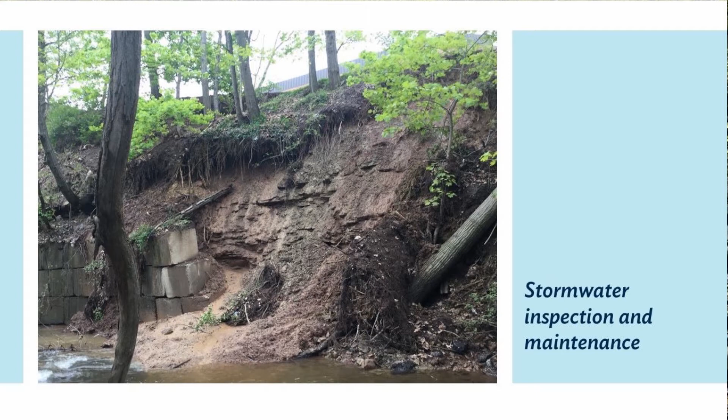One of the first things that we've done at the Northeast Ohio Regional Sewer District, and we've been doing this for years, has been getting out in the field and inspecting the regional stormwater system. Again, that 476 miles of stream network, whether it's a small tributary stream or the mighty Cuyahoga River, we are inspecting that for debris jams, sediment deposition, erosion issues, understanding where flooding is occurring and affecting infrastructure, road crossings, private property, and the like. As you can see, there's much debris that accumulates in these stream courses, big and small, at critical points within the system, either at culvert crossings, railroad crossings, bridge abutments, and other items like that that could cause significant issues during large storm events.

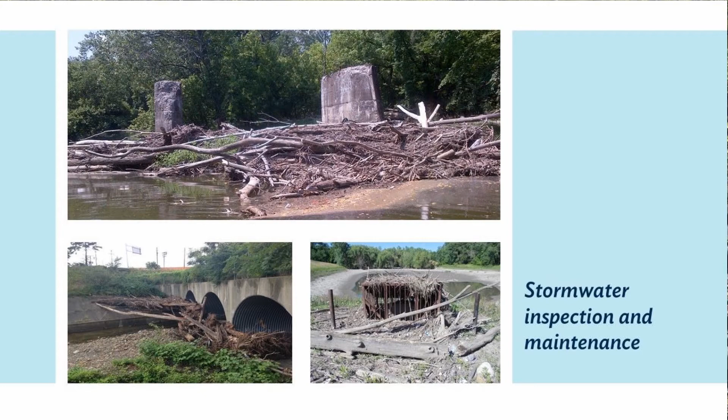So our stormwater inspection and maintenance crews are out in the field inspecting that and then managing to remove that material from the system. So again, we achieve free-flowing conveyance during storm events.

Any customer in our service area can contact the Northeast Ohio Regional Sewer District to make us aware of issues that they see on their local stream. Our customer service number is 216-881-8247, and you can contact that number at any time and get a customer service representative to pass that information on to our stormwater inspection and maintenance group.

We do service 56 member communities through our stormwater management program, and we have a person that's dedicated and assigned to each of those communities, and we refer to those folks as our watershed team leaders. So they are a conduit to the communities and back to the district for information passage back and forth, so we understand what's happening in the field at all times.

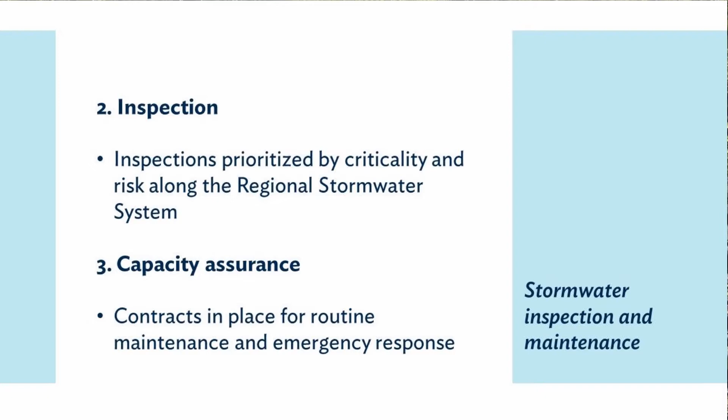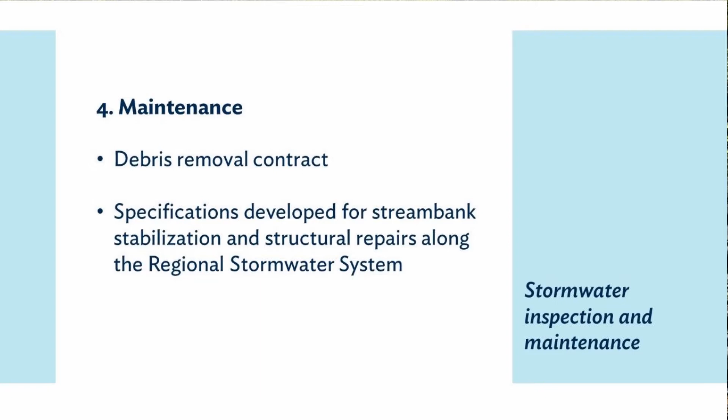As I mentioned before, we do thorough inspections of that regional system throughout the year to ensure capacity, and if need be, we have contracts in place to address any emergency issues that need to be addressed and or routine maintenance throughout any given year. We're addressing debris removal. That's typically large woody debris that accumulates along the stream or river corridors that builds up in the stream itself. We remove that material again to make sure that we have free-flowing conveyance.

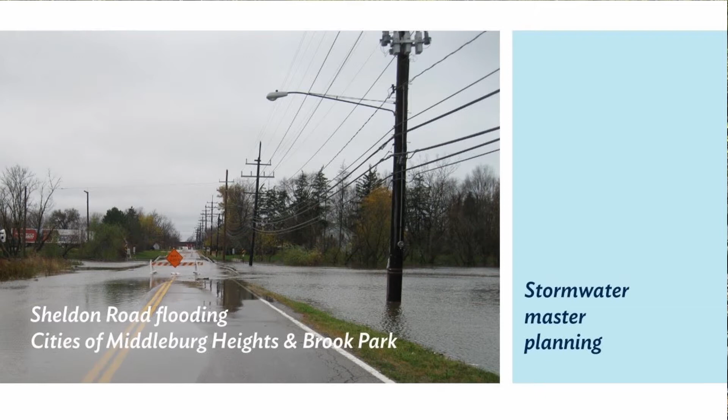The next main pillar of our program is our stormwater master planning program, where we are looking at each individual major watershed for the first time really ever in Northeast Ohio to comprehensively understand where erosion is occurring, how the flooding is occurring, and what it is affecting, and then what water quality issues that we can try to address as we deal with the erosion and flooding.

To give you some understanding of what those are, we have the Cuyahoga River South master plan that is nearing completion, or it is completed now. That was a significant investment for that particular area, where we have developed alternatives and now recommendations that we will move into our design and construction phase to implement solutions along those watersheds within that master planning area.

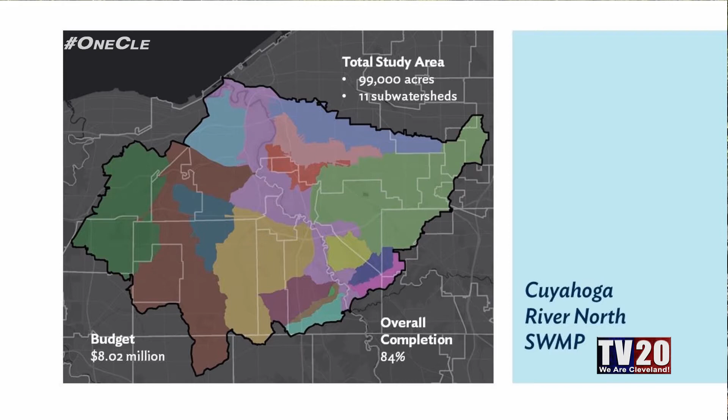We've broken the Cuyahoga River up into the south and north areas because it is a larger watershed, and we're moving to completion on the Cuyahoga River North master plan—another significant investment in the region to understand all the erosion, flooding, and water quality issues in this watershed.

The Rocky River is receiving the same treatment, so an individual stormwater master plan is underway in the Rocky River watershed, addressing streams like Baldwin Creek, Abram Creek, and Baker Creek in the western part of our service area. We've also combined the Chagrin River and Lake Erie direct tributaries watersheds into one master plan, launched this year in 2019, looking at those same issues discussed on previous watersheds.

From the master plans, we develop alternatives and recommendations, and those move forward into a nomination and prioritization process, from which we take our stormwater revenue fees and develop a prioritized budget for design and construction to implement projects throughout the region addressing erosion, flooding, and water quality issues.

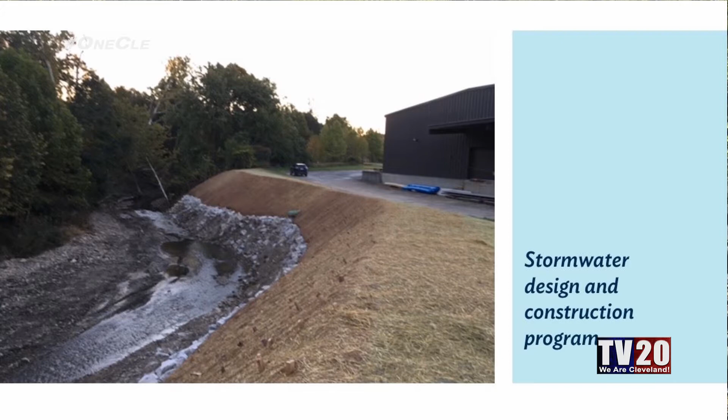To provide clearer examples of what we're addressing: this is a location where the stream bank along West Creek has failed, close to an assisted living facility and a medical facility. The regional stormwater management program looks at this issue through the master plan, understands the best alternatives, and develops a refined recommendation to create a prioritized project we can budget and implement to solve this issue.

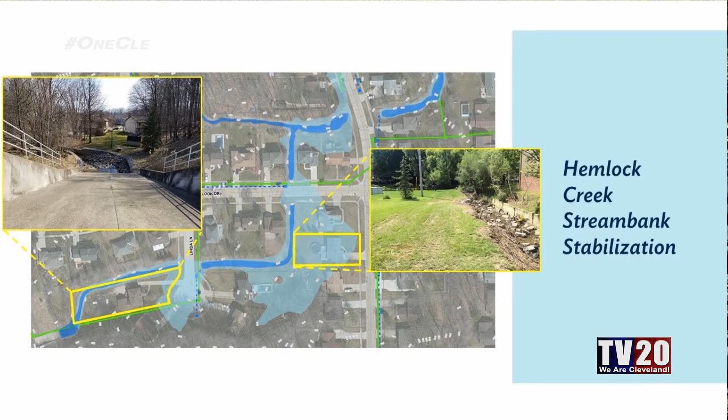Another example is in the Hemlock Creek watershed, where residential development has occurred in the past. The stream has been maneuvered and pushed in different directions over time, creating flooding and erosion issues that need to be addressed. We apply our master planning analysis, develop a recommendation, and move toward design and implementation of a construction project to address the stream affecting private properties along Hemlock Creek.

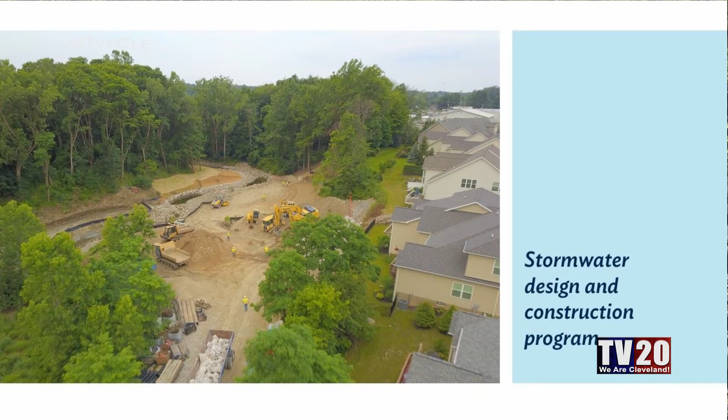Moving into construction—what have we done thus far under the program? The program has been moving forward since 2013 when we initiated fee collection, and I'll talk more about the stormwater fee in a few moments. In terms of construction completed thus far, here are a few examples.

This first example is Beecher's Brook in Mayfield Village. You can see the significant erosion occurring along Beecher's Brook—it's been happening for years. Beecher's Brook has steadily been marching toward a residential development. In the picture shown, you can see the rooftops of the homes up on the bluff overlooking Beecher's Brook.

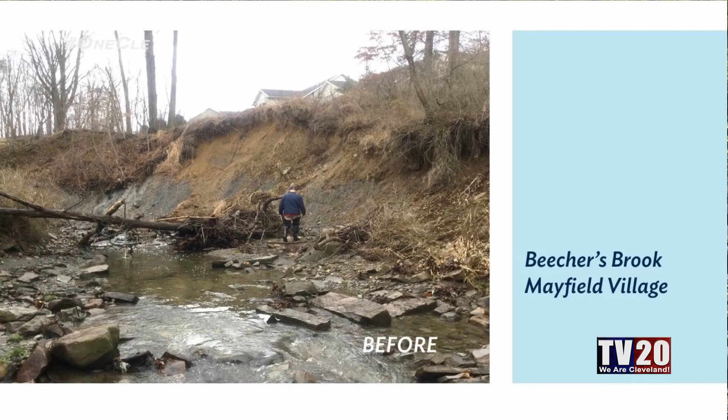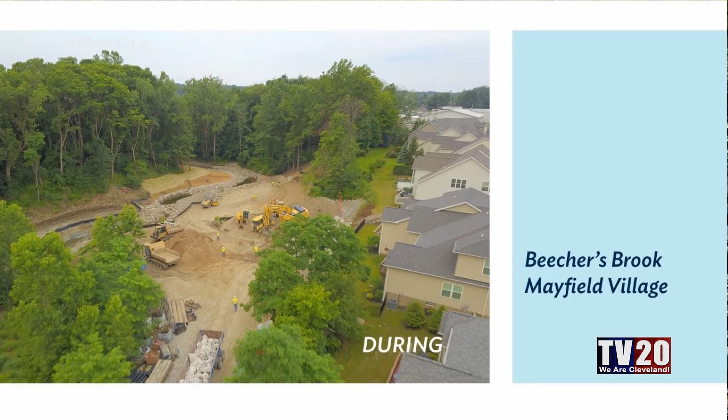In this photo you can see the construction underway—an aerial view showing the proximity of the actual homes adjacent to Beecher's Brook. At this point we've already moved Beecher's Brook further away from the homes, using natural channel design with more sinuosity and flow path to dampen flows during storm events, lessening the velocities to soften the erosion that was occurring.

So we provide a holistic watershed-based approach to our projects to ensure that we capture not only erosion control and flood control, but also water quality.

Moving into Doan Brook within the city of Cleveland, in the Rockefeller Park area—Doan Brook, again, was marching steadily toward the Cleveland Museum of Art, causing a slope failure.

So this was an area that needed to be addressed as well from an erosion standpoint. This is a view of that project under construction.

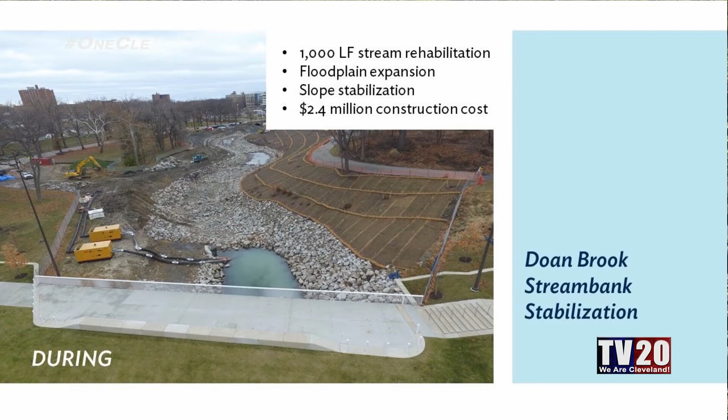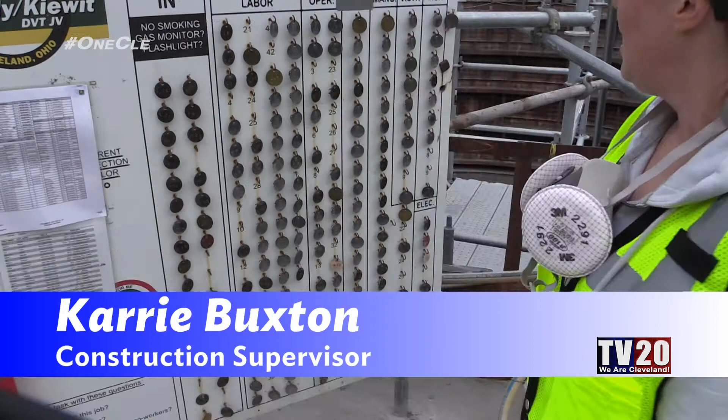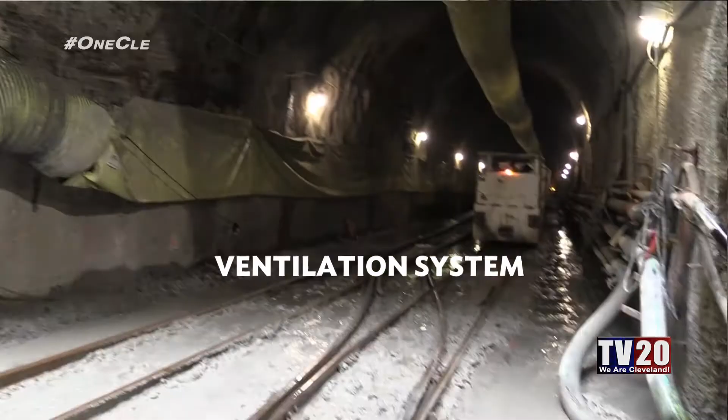So all these brasses where it says brass in, these are all personnel right now that are down in the tunnel, which gives you an idea of how many people actually go in and out of the tunnel on a daily basis. This is our ventilation system - that's the actual ventilation that goes down to the TBM, that flexible line, that flexible bag line that you can see there. Those are the actual segments that we use to create that lining system.

All the grout that's produced that goes behind those ring segments as they're installed gets produced up here. It then goes down via pipeline the whole entire length of the tunnel to the actual face where it's being injected. Right now what they're doing is they are unloading muck boxes.

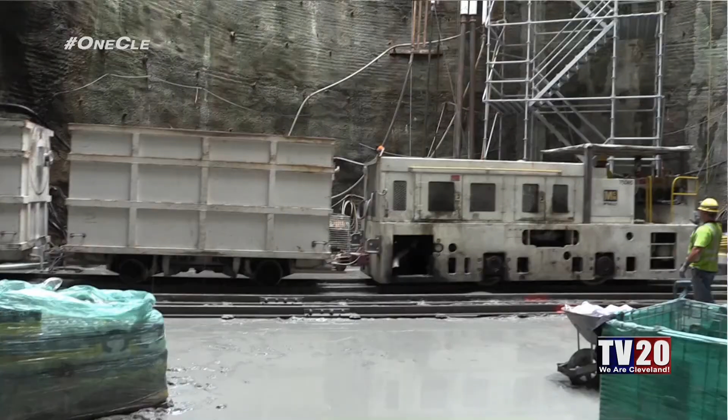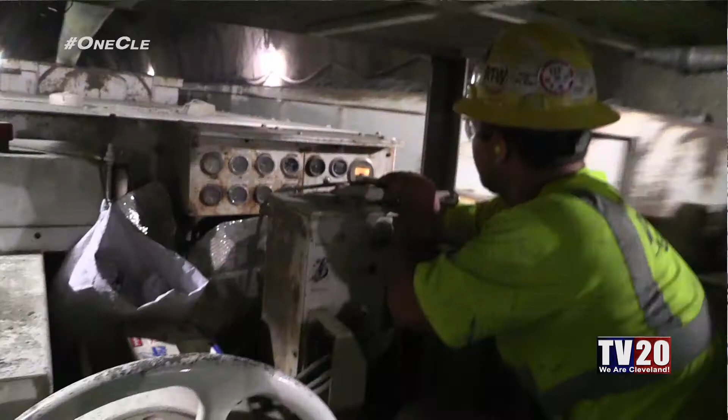For every 5 feet of mining that we get, it fills up about 8 muck cars. Once the train cars are empty, this train will move its way back up to the TBM and get refilled and then come back. It's a constant shuttle all day long - they have 2 trains running the whole entire time. As we get farther and farther away from this location, it takes longer and longer each trip - about 20 to 25 minutes to run out to the actual cutter head.

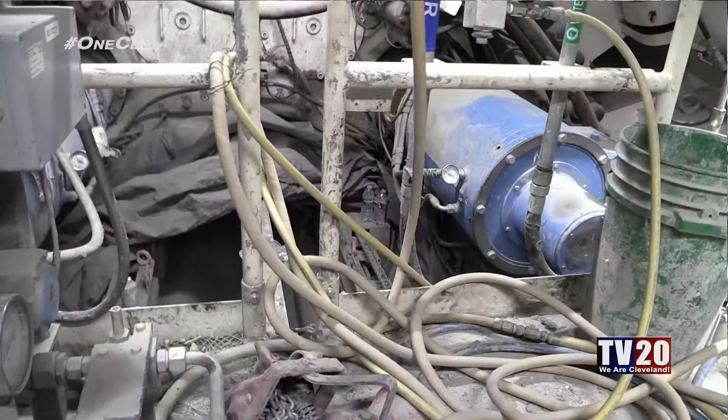This is the actual spoil straight from the cutter head. As that cutter head is spinning and thrusting forward, that is the material that it's actually grinding out. So we're running mining operations out of here 24/7 right now - there's 3 shifts.

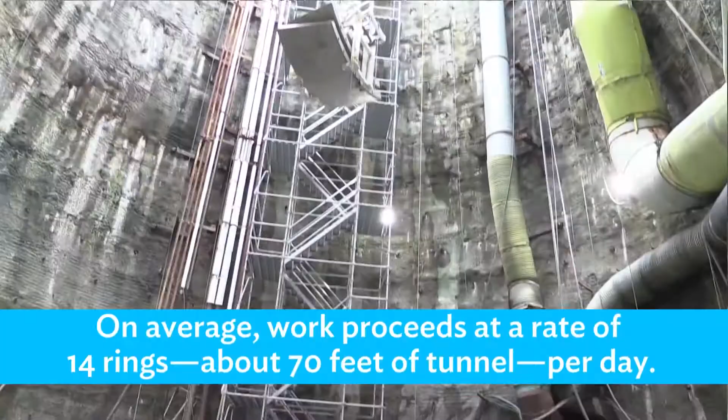Solid concrete all the way through the segments. It's actually a steel fiber reinforced concrete.

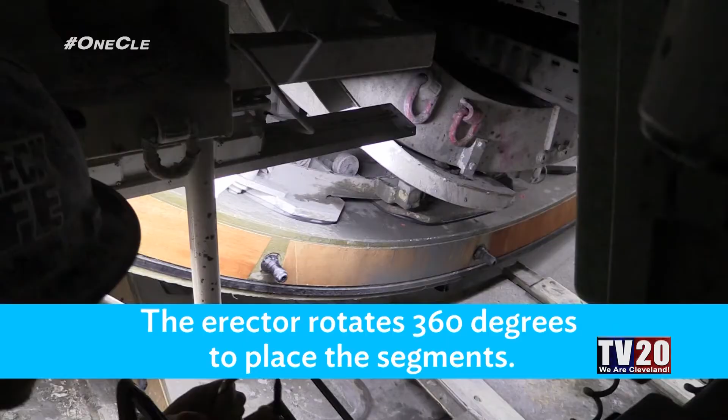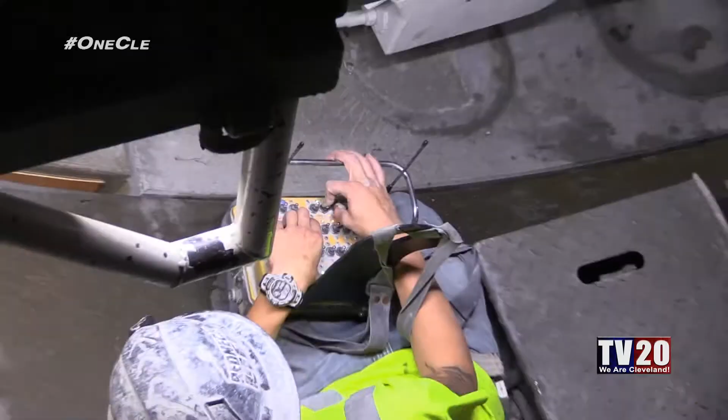I've been in this business now for about 20 years. After a while, you don't even realize you're down here. You forget you're even underground sometimes, for me anyways.

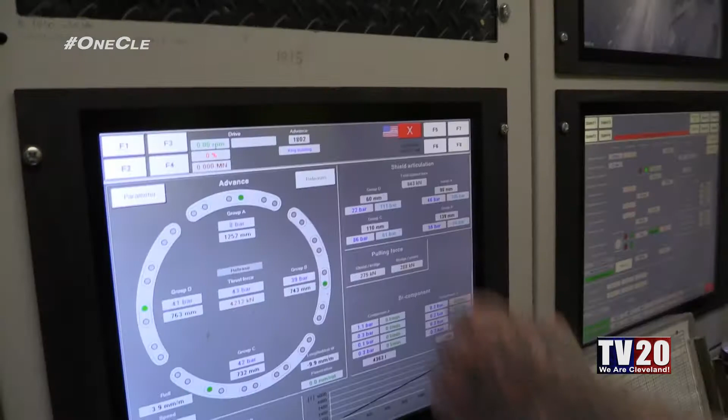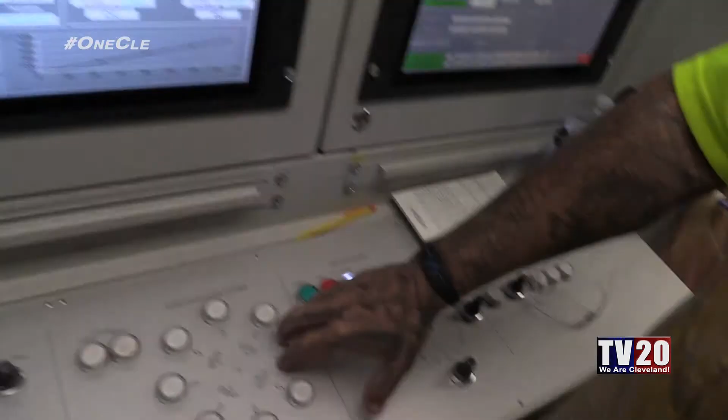Here we have our guidance system - it gives us an idea of where the machine's at and where we need to be. We can control the angle of the head with these controls here. For example, if we need to go to the right, we can steer right here and then also push harder on the left side of the machine. It's been a fantastic machine so far.

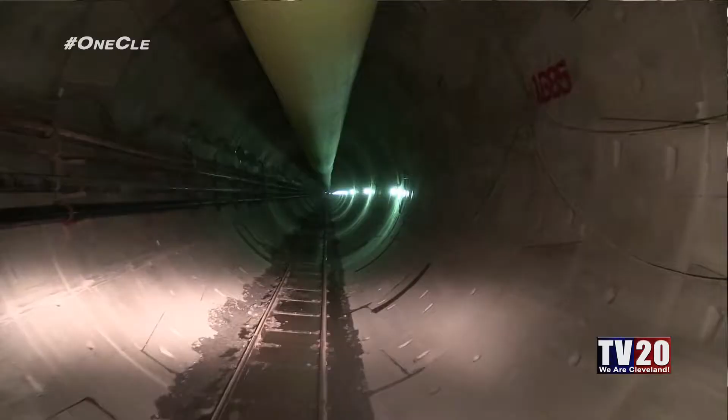Now this is the keystone that he's putting in right at the top. Once this tunnel is finished, it'll almost be 2 miles in length.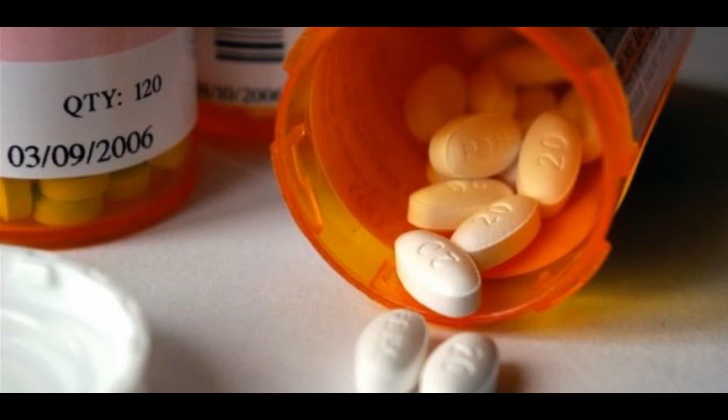Did you know flushing your expired or unused medications can be harmful to the environment? Wastewater treatment plants are not equipped to remove pharmaceuticals from wastewater, and when the treated water is released into the Cuyahoga River and Lake Erie, it can still contain traces of these medicines. The best way to dispose of unwanted medicine is to check for a local collection event. The Cuyahoga County Sheriff's Drug Drop Box program allows residents to deposit unwanted prescription drugs at drop boxes across the county.

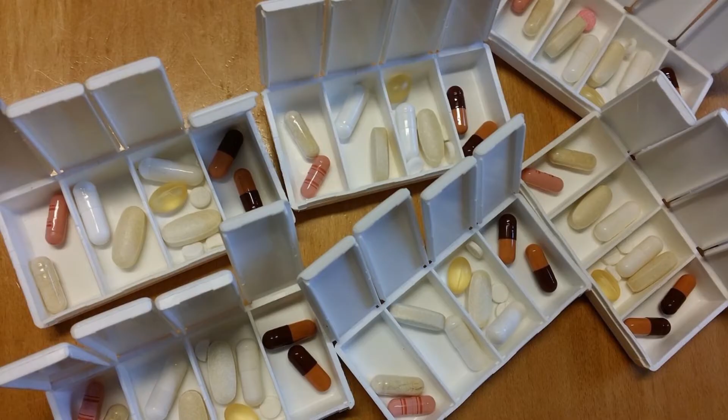To find a drop-off location, visit rxdrugdropbox.org or call 211. The Northeast Ohio Regional Sewer District also makes it easy to pitch those pills and safely dispose of unwanted medications at our free pharmaceutical collection events. If you are unable to attend a pharmaceutical collection, there are ways to safely dispose of medications at home. Visit neorsd.org/pitchthosepills for more information. Protect water quality and your family by disposing of pharmaceuticals properly and safely.

Now Jen is going to talk to one of our microbiologists about water quality and testing. Today I'm here in the Analytical Services Department of the Northeast Ohio Regional Sewer District. Our lab conducts tens of thousands of tests every single year, testing waters from area beaches, from waterways, and our 3 treatment plants as well.

Today I'm here with Adam Diedrich. He's a microbiologist here at the district. Can you tell me a little bit about the study that we're participating in? Yeah, so right now we're testing the waters of the beaches and rivers in Northeast Ohio for bacteria that is specific to humans. This bacteria lives in the human guts, and when we flush our toilets and the water goes into our sewer systems, it can potentially get into our lakes. So right now the human DNA that we're testing for is called HF183. It's a method that was developed by the EPA, and we brought it into our lab to use.

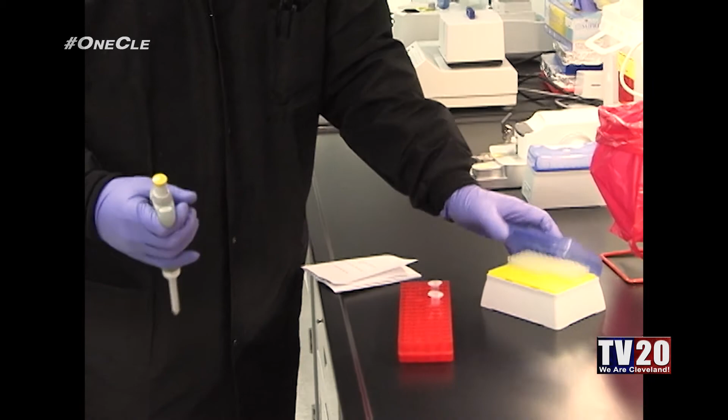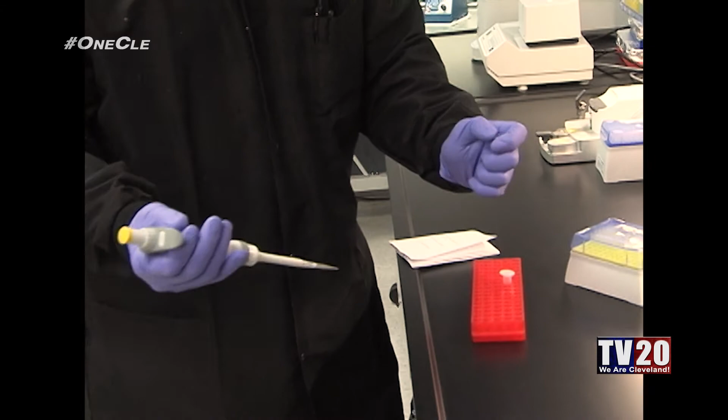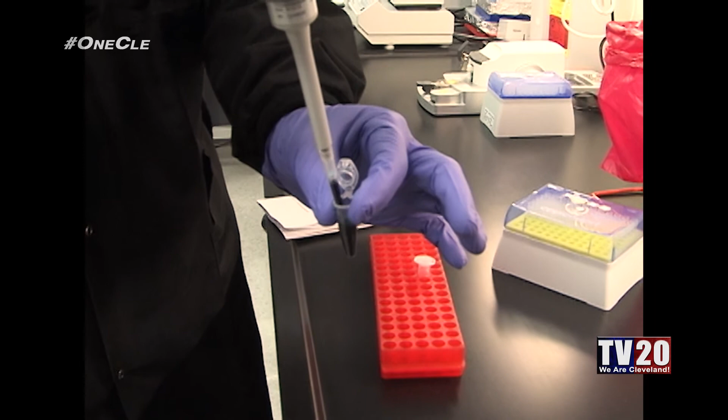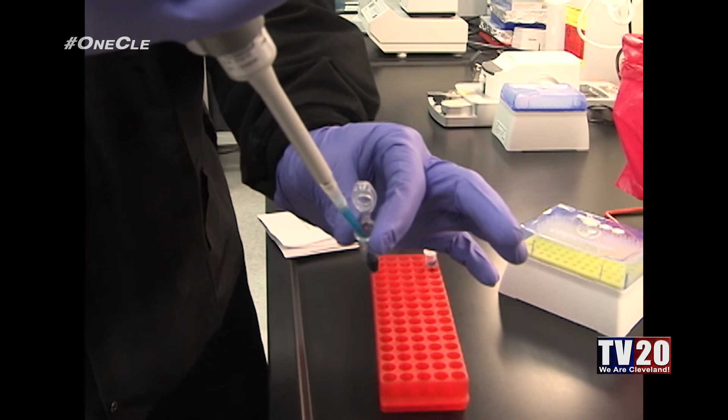Can you show me a little bit about the work that you're doing here? Yeah, so one of the things I work with commonly, pretty much every day, is called a micropipetter. What you do is I have this box full of tips. Get one tip. There it is. And I take this nice little blue solution that I've made, open the cap up, insert. The fluid gets drawn up. I transfer it into the other tube. And then ideally, when you're actually running the studies, those would be samples that would be collected by our Water Quality and Industrial Surveillance Group, right?

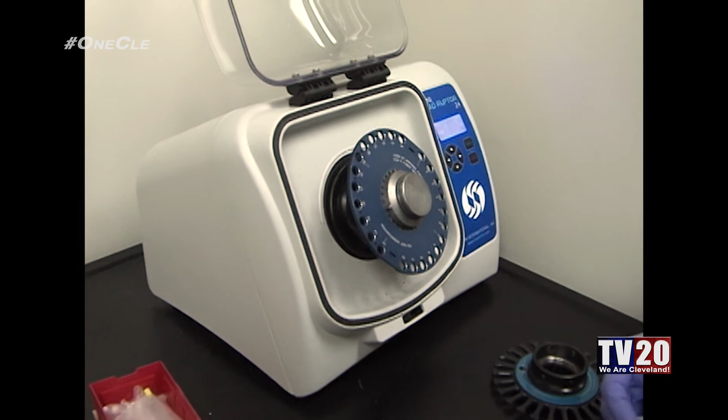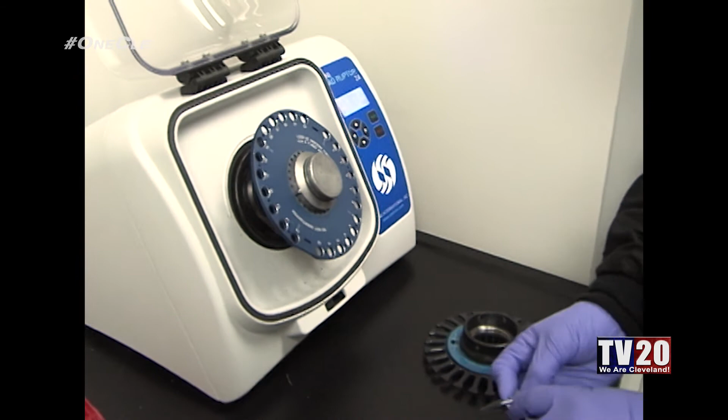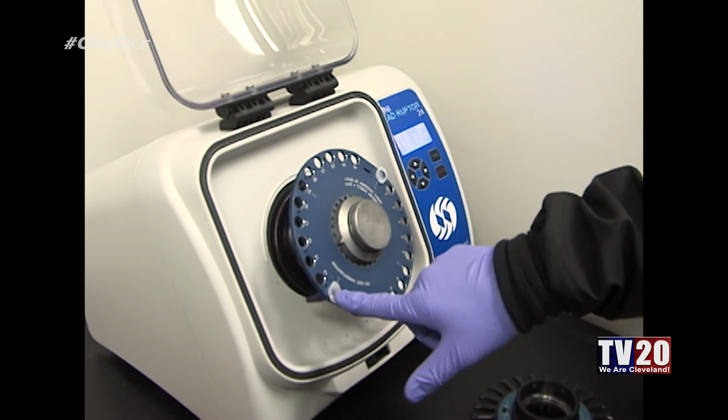Yeah, they go to rivers, the lakes. Certain CSOs are tested on a regular basis. We periodically get samples from our wastewater plants. So once our sample is taken from the environment and put into vials such as these, we need to break the cells up so we can get access to the DNA for the testing. For that, we employ a bead beater. It beats up the cells and allows access to the DNA. So for this instrument, you have to load it evenly. So that's why I have one vial here and one vial here. Next, we put this little cap on it. Next, we lock it, put the cover down, and the fun part.

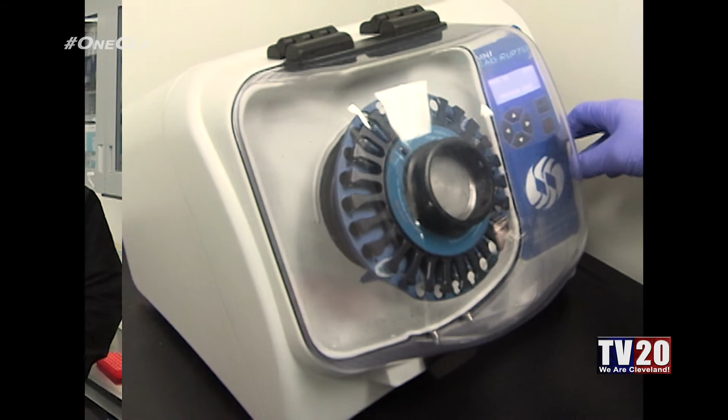So when the study's completed, what do we expect to find, or what do we hope to find? Well, we always hope to find no contamination. Unfortunately, that's not always true. So we monitor locations to find out if there's human DNA in our water streams, and if there is, it gives us an opportunity to figure out where it's coming from and to mitigate that issue.

Great. Well, thank you so much for having us out today, Adam, and showing off a little bit of your lab. We really appreciate all the great work that you do and the great work that your entire team does to help make our Great Lake great. Yeah, you're welcome. Thank you for having me.